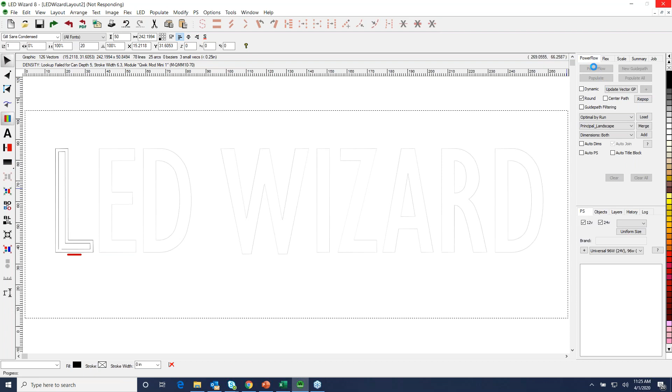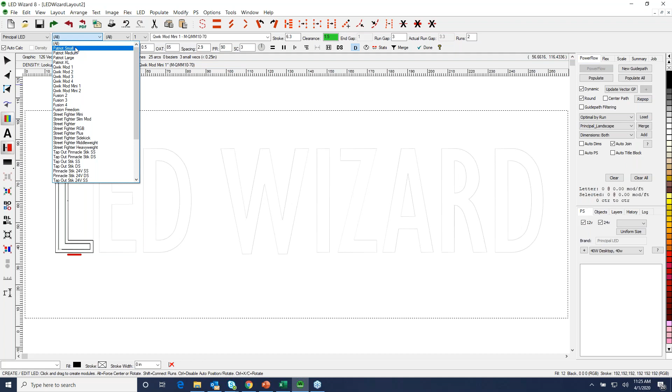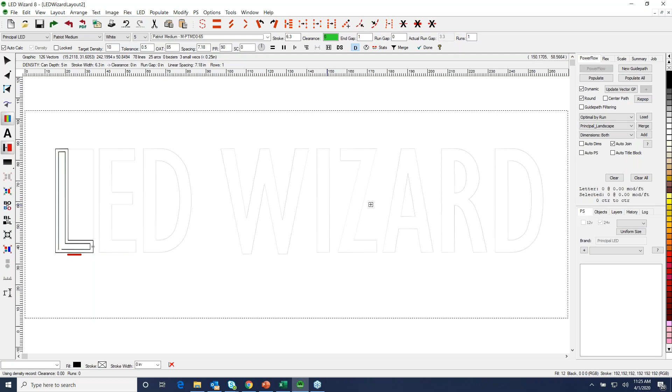So I click on Patriot Medium, and it comes in white. Medium has a depth range of 4 to 6 inches. Okay, so I select 5, and then the module drops down. There's actually just one module, and so that just drops down. So this is a case where, because I've changed the module now, I'm going to click on New Guide Path, and it's going to recalculate.

And now it looks in the density guidelines and says, okay, I just need a single run here. I've got a stroke width of 6.3 inches. I'm going to do a single run, and my spacing is 7 inches. So this is about 1.8 modules per foot, something like that. Okay, so that's how the filtering of modules works, and that's what those settings I was showing mean.

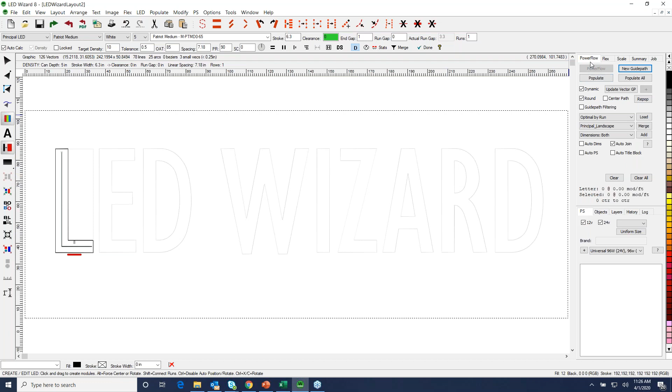So that's the default, and back over here now in the PowerFlow tab, I would click on Populate All, and what it does is it goes letter to letter, and it figures out the center of the stroke, and it puts the modules in again at, in this case, a little bit less than 2 per foot. And I think it's a good population.

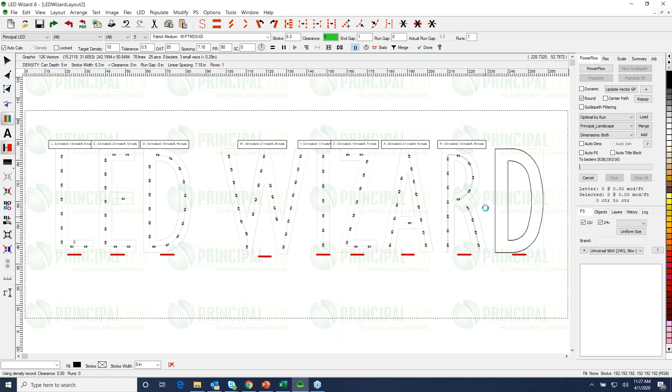We're clearly seeing some parts that we're going to want to go back in and edit, which is one of the points of the webinar, to show you the process of doing that. So this is a layout that I come up with, and I do want to point out at the top above each letter is a little stat object, and this can be customized. You can have whatever information here. I think there are maybe 5 options on this, but it tells you the letter.

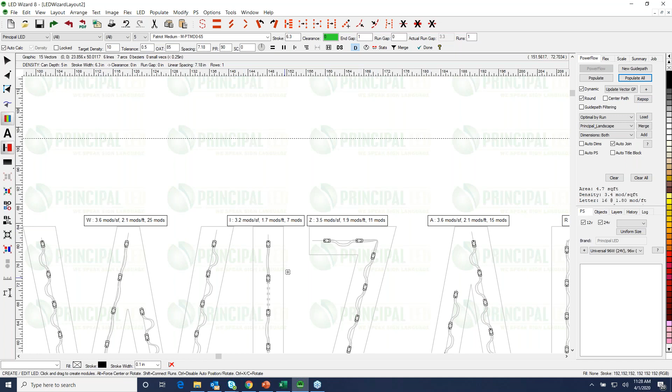It tells you the modules per square foot. Okay, 3.3 modules per square foot. It tells you the linear measurement, 1.8 modules a foot, and it says that I have 9 modules. So the idea with the modules per square foot is that you want those values to be consistent across your letter set. Okay, so 3.6, 3.2, a little bit of variation there, but this is a consistent stroke font. These numbers ought to be pretty consistent. Looks like maybe 3.4 is about the average.

Yeah, go ahead, Lauren. Next to the spacing at the top, what does the OAT stand for? Oh, OAT, yeah, it's one of these obscure ones. This stands for outside angle threshold. And what this means is like on a sharper angle. So let's say that this was actually a double layout, which it's not. This determines when the path rounds off, and when it stays as a sharp corner.

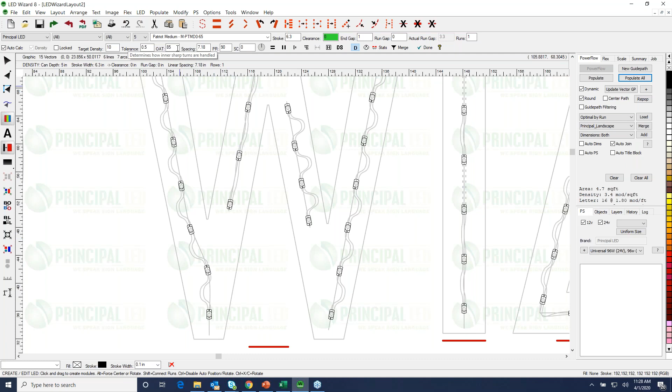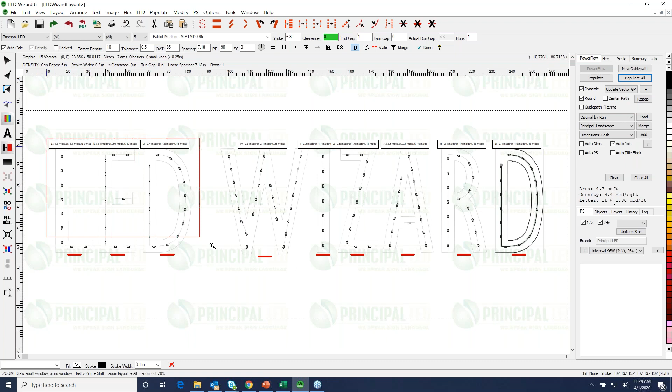So I actually like to have this value lower because I think it creates more sharp corners, which are generally better layouts. But that's what that means. So anything above 90 would actually create rounded corners around a 90-degree corner. And again, this is really more on double layouts. Jeff, we also had a request if you could demo how the mods look for a double row. Sure. Yep, absolutely. In fact, I'll do that next here.

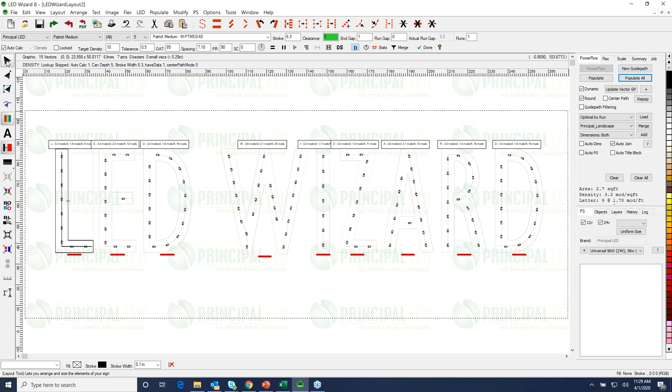So anyway, modules per square foot, again, a measurement of brightness consistency across the letters. So that's what this would look like, again, this particular font as a single. I'm using control to click and drag to make it bigger. Let's do a double layout with a little bit of a thicker stroke, and I'll make this, let's say, 72 inches.

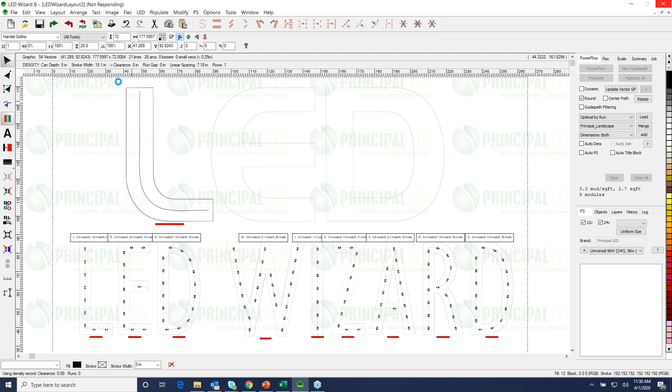Make sure we've got something really thick. And I know that the Patriot module covers a pretty big stroke with a single run. So it looks like it's got a 15-inch stroke and is still a single run, but I can knock down the can depth to 4. Okay, now it's showing me a double run. So this is what a double run looks like, and the way that we figure out the spacing on a double run is basically that we take the full stroke width. In this case 15, and 1/4 of the stroke width becomes what we call the clearance.

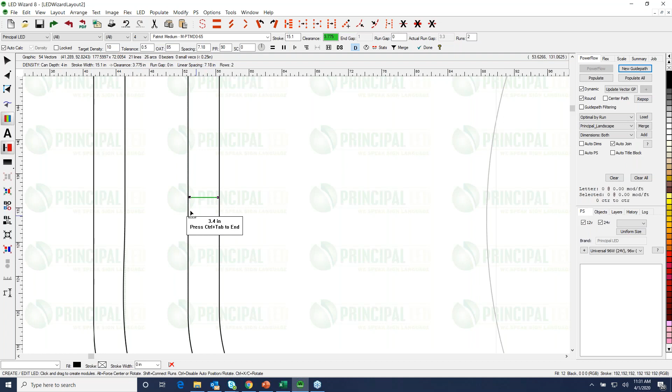This value right here, and then what we call the run gap would be essentially half of the stroke width. So that's our basic math. And in PowerFlow, if you do Control Tab, you get this little measuring tool. So this ought to be about 7.5. Okay, so that's kind of the math that we use, and that's the default. Now you'll see this red line down here, and that's actually a visual representation of the stroke width. And you see it on the letters below too.

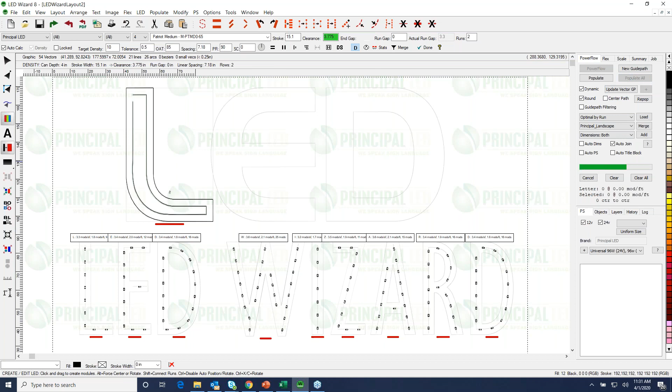So that's the actual stroke width. That represents right there 15 inches. Okay, so that's how we do the spacing. And again, for each letter, it does a calculation of the stroke width. So the D was exactly the same as the L, and the E, if I click on here, 16. So a little bit more. Okay, so that's essentially how it works on a single and double.

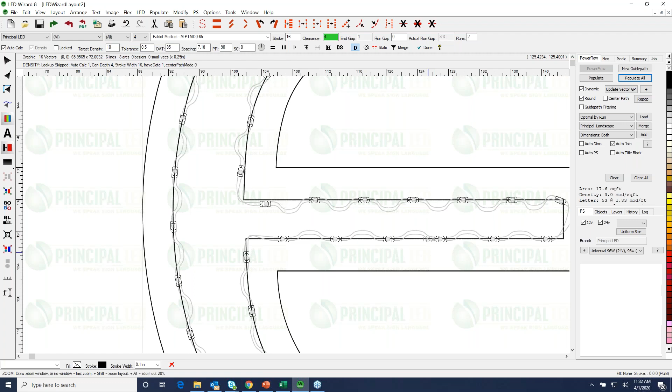And again, if you want to change that, you can see that in this case, the 16 inches is probably on this thicker stroke here, but maybe this stroke here, you feel like it's not exactly that same ratio. Then we can edit this and we can make a slight adjustment if you feel that's necessary.

Okay, so that's an example of a double, and it would go on to triple and quadruple, et cetera, if you have a really gigantic letter. Next week, we'll talk about cabinets. We'll do parallel runs and hybrid layouts and all kinds of fun stuff. But that's on cabinets.

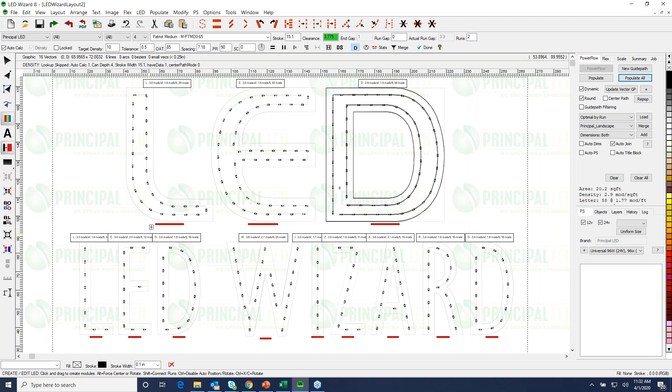Okay, so let me talk about this now. If there aren't any more questions, I want to switch this back and go talk about module editing.

Now, sometimes when you make a layout, it comes out perfect and there's no editing needed, and that's wonderful. Sometimes editing is needed, and a lot of times it's very simple - you're moving a module around, adding a module here or there, readjusting spacing, this kind of thing. So module editing is an important part of PowerFlow. I call it fine-tuning the layout to get it exactly the way you want.

There are really two different categories of module editing. There's editing of single modules, where you're acting on one module, clicking on it and moving it. And then there's the idea of multiple modules, where you make a selection and manipulate multiple modules at the same time - that's kind of what you see in this example. I've got these modules highlighted, a little bit more bold, meaning they're a selection of modules.

Okay, so let me get out of this - I just wanted to introduce that concept. So when I zoom in here, you can see that I click on a module and I can slide that module along this guide path. On an individual basis, I can do that.

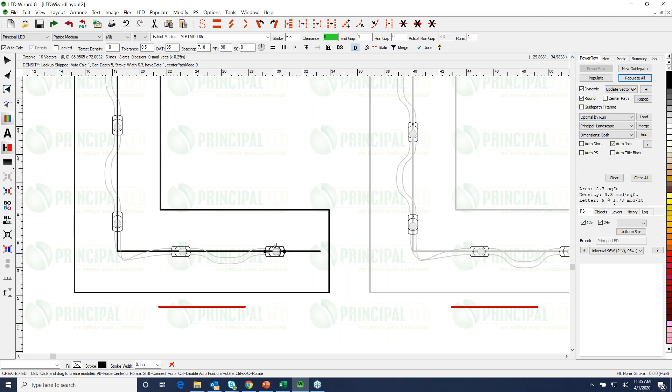Here in the PowerFlow tab, we do have various power supply loading options, and this process is pretty automated based on one of these options. I'm afraid I'll run out of time if I get into power supply loading, because that's a topic unto itself. So if the person who asked wants to reach out to me directly afterwards, I'll show it to you, if that's a fair way to do it. My contact information will be at the end of the slides. But for a letter set like this, it's pretty straightforward to load power supplies.

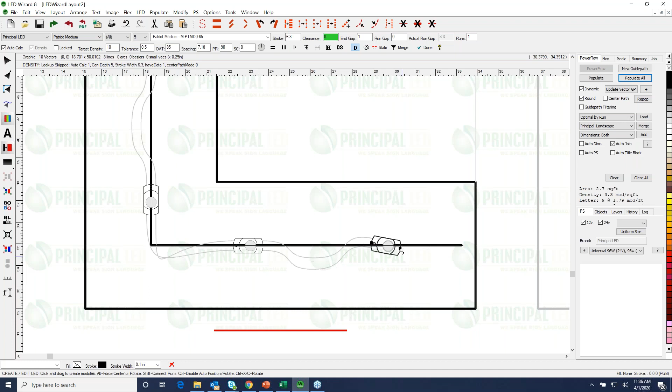So in addition to moving a module, I can rotate a module by one of the points on the end of each module. This being Patriot, a single LED module, module rotation is a little less compelling than it might be with a 3 or 4 LED module, where rotating it disperses the light a bit more. So maybe not as practical with Patriot.

Now, if you want to move off of the guide path, let's go up here to the D - I have to hold the control key. When I hold control, I can move the module anywhere. If I release the control key, it snaps to the generated path. You can see that I've got a little bit of a gap here.

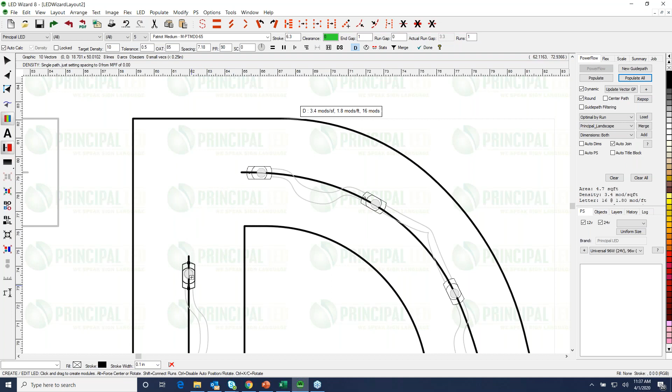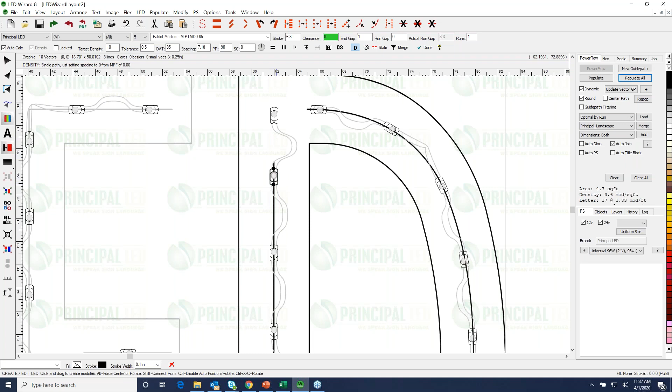So one option is to hold control and move this module here. Now I've created a gap and an empty space, and you'll notice that as I position the mouse in here, I get a green module - we call it a preview module. In fact, anywhere I move in PowerFlow, attached to my mouse position is this preview module. But when I position the preview module on a path that has the dotted line and click there, it actually inserts a module into that spot. That's one way to cover that gap.

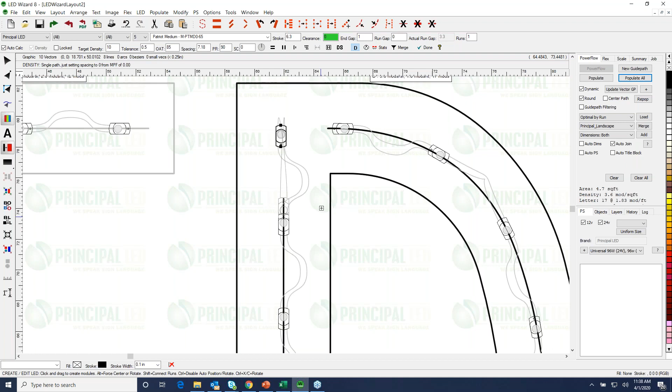Another way is to just position the mouse up there. I'll hold control because it doesn't quite know where to go, but if I hold control, position, and click, then it'll put a module there. So with this preview module, wherever I click, it's going to insert a module there.

If I want to delete a module, I just click it and press the delete key. You'll notice that as it deletes, it stays on that path.

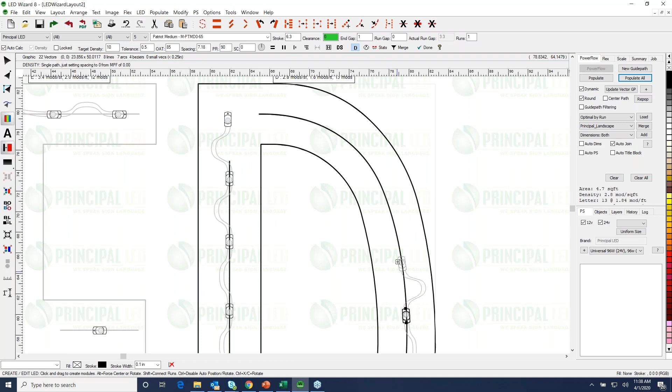To add these back, I can do this manually. I can go along here, try to maintain that same position, and click. Each time I click, it inserts a module. So that is what I would call individual module editing.

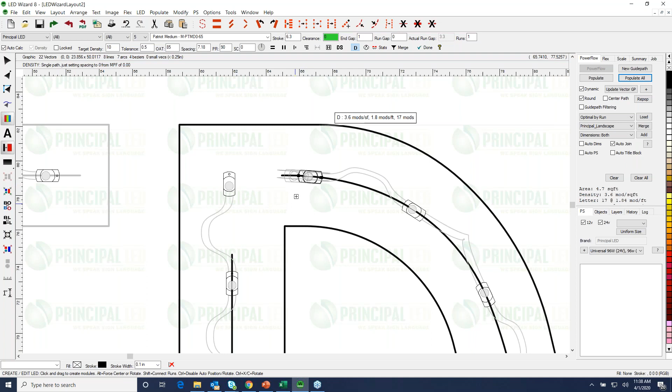There is another option here. Let's say I want my wire to break down here at the bottom, where I've got my drivers coming out of the bottom of my wiring hole. I could go here, hold the mouse, and press the O key. O is for open, and it's a shortcut key because where it opens is determined by the position of the mouse.

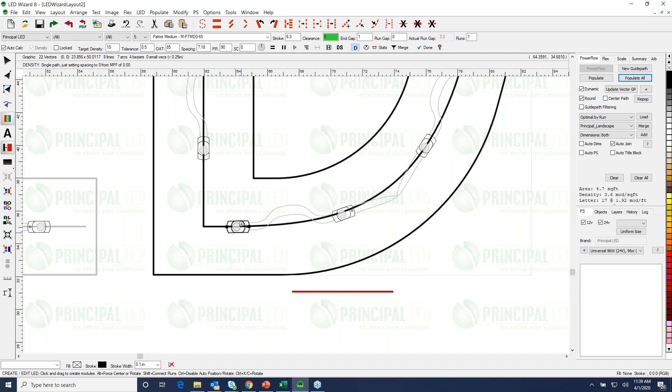I'll talk in a minute about shortcut keys and where you find them. So I've opened it there, and now I want to close it up here. In order to close a loop, I click on the module, hold Shift, and then click on the other module, bridging those two together.

Now I've connected it up here, and I've got the opening down here. One thing you'll notice is that my underlying path is now not really accurate to the layout I've created. So I talked a minute ago about these buttons here.

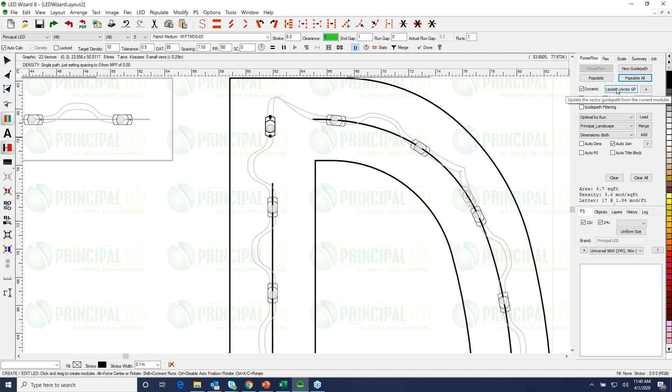I'm going to do update vector GP, which means update vector guide path. When I click on that, it says, oh, there's supposed to be a vector here because that's the position of my module. So it creates that vector, opens it, and breaks this one down here. That's kind of the relationship of the underlying path with the position of each LED.

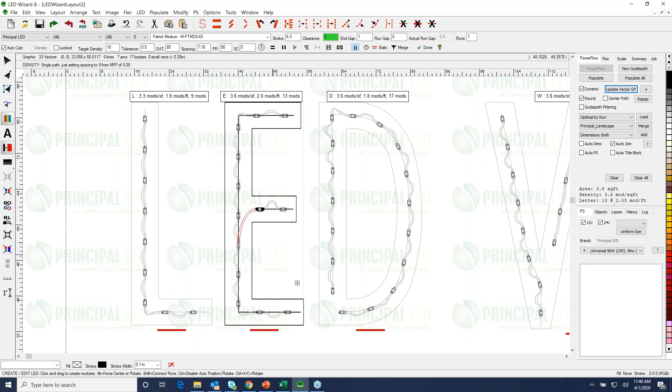Here I might look at this and say, well, I should really have two modules here. So I made that change. That's a pretty easy one.

When I look at this W, this is always kind of hard, right? When you have this tight of an angle, do I connect the run, or is the run broken? So here's a case where I'm going to need to do a little bit of editing.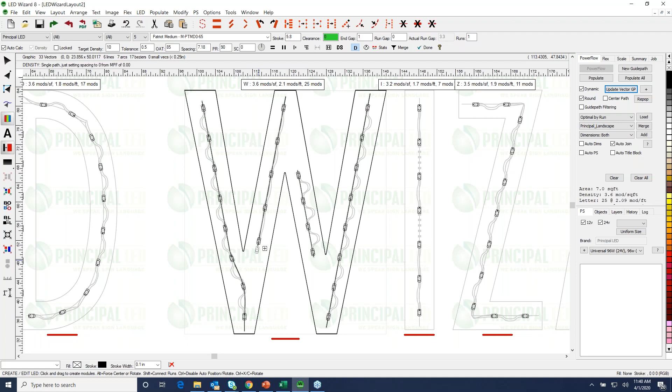Before I do that, let me go back. Apologize, getting out of order here. Let me go back to the D because I do want to talk about selections of modules before I go to edit that W.

So you notice that I was individually moving LEDs, moving them around one at a time, and that's okay if there's just a little thing you want to fix. But what if I want to make a change to this whole run? I want to put more modules, or rotate the whole run, or something like that.

Then we use what's called a selection. To create a selection, I click on the end module, hold Shift, and click on the other end. All right, that's now my selection.

Once I have a selection of modules, there's all kinds of stuff I can do in terms of editing. One of the main things you want to do with a selection of modules is make sure that the spacing is really even. In this case it is - this was a pretty good layout. The spacing's real even, but I have a set of icons up here that I have access to.

Just for fun, let me make a couple adjustments. I'm going to change the spacing, reselect this, and now you can see I don't have good even spacing. I can click on this icon called uniform spacing, and that shifts it back and makes sure all that spacing is consistent.

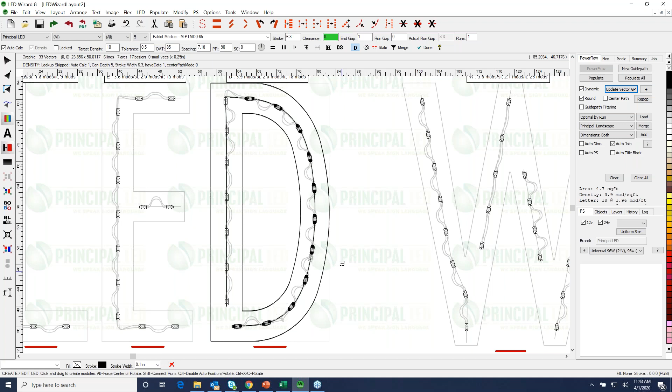This is an easy way if you want to make the population a little bit brighter. Now, if you wanted the whole letter set to be brighter, you would just adjust the spacing value right up front when you make the population. So if I change this to 6 because I want 2 per foot, or 4.8 because I want 2.5 per foot, I would do that right up front in the population, and all the letters would populate with that same spacing. That's really a better way to do it.

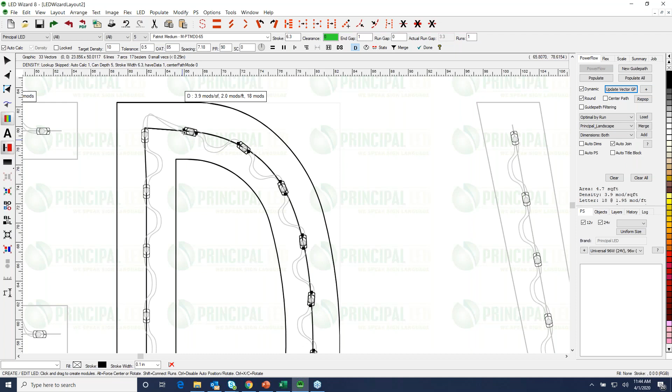But that's a selection of modules. You can also rotate. When I have a selection, if I'm rotating, it rotates all of them. Again, not a whole good reason to do that with Patriot, but that's rotation. So that's essentially what I wanted to show with select.

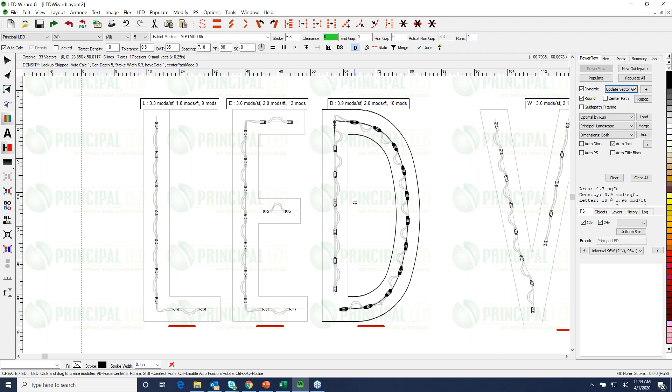Those are the most common things to do with the selection: W, E, and R. Now I'm doing it on the keyboard, just touching keys, W, E, and R. E is just for respacing. So a very quick and easy way to do a little bit of fine tuning on the layout.

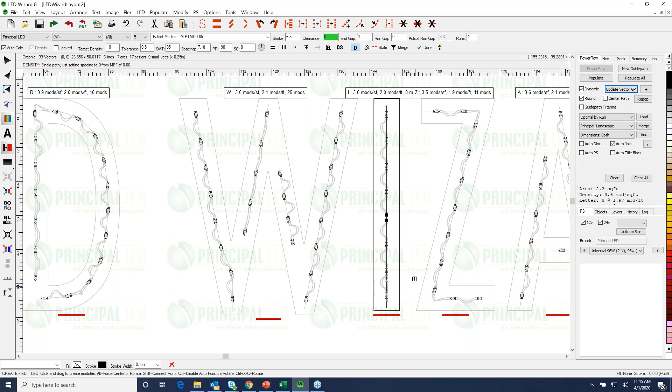In fact, if I click here, this looks to me like I've got a couple of wires there. So I'll tell you another little shortcut here, which is if you have a consistent run that doesn't go around any sharp corners, I don't actually have to select both ends like I showed you. I can just click somewhere and then do W, and that inserted one module. So that's a little bit of a shortcut.

So that's some basic module editing: moving on and off a guide path, adjusting positions, opening and closing loops, that sort of thing. The W here is a little bit more challenging, and I want to show the next step of this, which is editing of the underlying vector guide path. I think this is a good example to show that.

So I could use the same tools that I was just describing. I could put a module out here, and move this up here. But the other approach to doing this is actually to go into the vector edit tool. Now I can use my vector editing tools directly on this path. If some of you are new to the software coming in here with a background in programs like Illustrator, AutoCAD, CorelDRAW, these are all vector-based programs. So if you're new to the software and prefer to operate in a vector world, you can do that too.

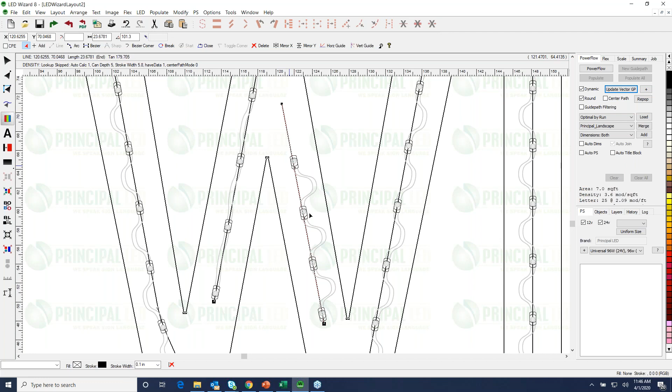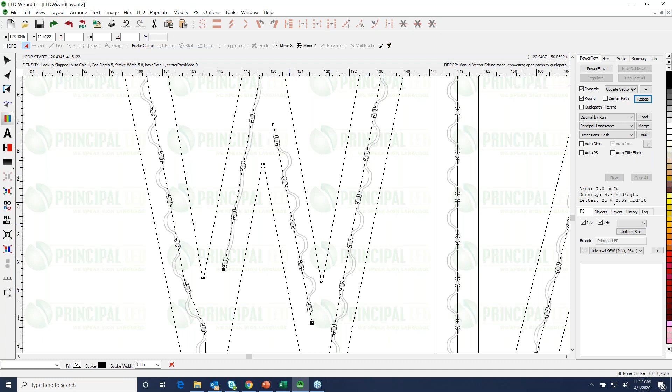You can just click and drag this endpoint. I move that up. Click and drag this down to fill in that gap a little bit. And now I would go over here and say repop. So this is kind of the opposite of what I did here. Repop says, take that new path and repopulate my modules to that path. It doesn't happen automatically because there are too many refreshes as you're editing, so we ask you to make the edit and then click on repop.

And I thought about it for this little case here. So here's a case where this run tried to sort of split the difference as these two strokes came together. And really, I don't want to do that in this case. I'd like it just to be straight. So here's a couple Bezier curves. I can delete that point entirely.

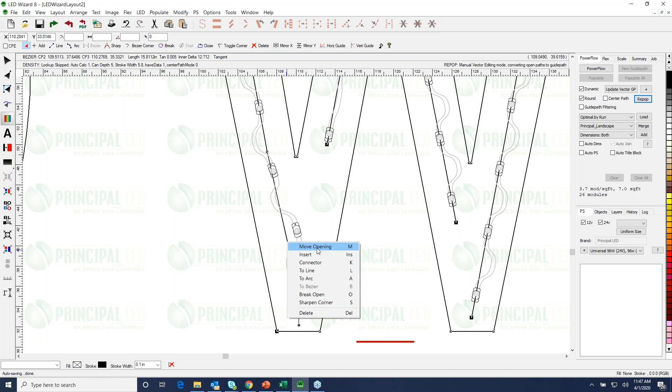If you're a previous user of our software, you know about the vector editing pop-up menu. So if you right click on a vector, you get this little menu. And I want to say to line, right? So I'm going to make this into a straight line. Actually, there's a little jog there at the bottom. So here's my straight line.

And again, I'll do repop, get that on there, bring this guy down. So you don't have to do repop all of the time. You could do it once at the end after you've sort of edited. But you know, I would do something like that, right? You probably don't need 2 modules coming into a corner that sharp.

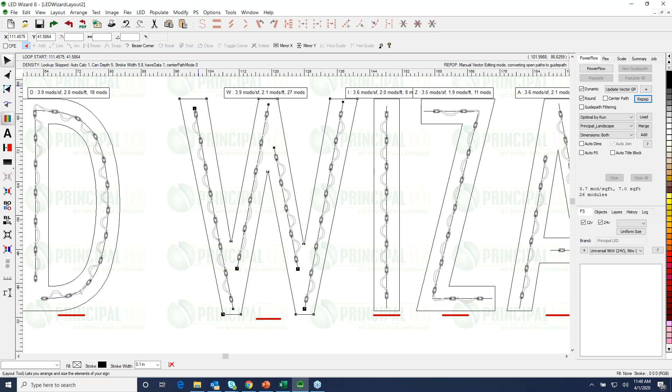So that's an example of using vector editing tools. So really, you can operate in PowerFlow if you're comfortable with those tools of just moving modules around, or you can operate in a vector editing world where you're actually editing those vectors and then having those modules match up. All right, so that's some of the basic editing that I would do.

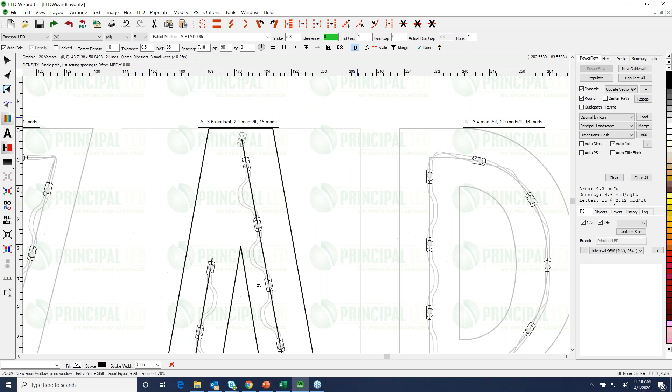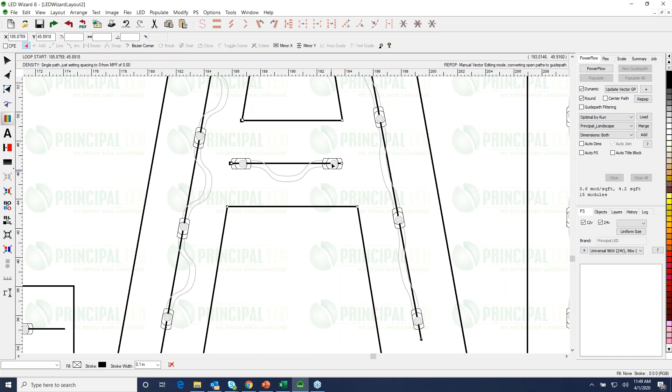Do this one more time, bring this up, and what I want to do here, oh, there's an extra line there, I don't need that, delete that out. What I want to do is I'm preparing this layout here to show you how the scaling tools work. And the scaling tools are a really fantastic part of the software where you can take this layout and we're going to scale it up to a larger size.

Jeff, one question. Sure. Will it auto-flow around mounting points if they're in the artwork that you import? No, it's really better to add your mounting holes and your wiring holes after you populate. If you have those in your artwork at the beginning and you break into loops and you don't include that artwork when you populate, then that's okay. It would just sort of populate on top of them.

But the workflow that I always suggest is, get the LEDs where you want them first, and then figure out where you want the rest of the holes to go. And we have a tool for that, and we'll talk about that when we do the production edition in a few weeks. We have a mounting holes tool and a wiring holes tool, but I think it's better to have the artwork be clean without that stuff when you go into PowerFlow.

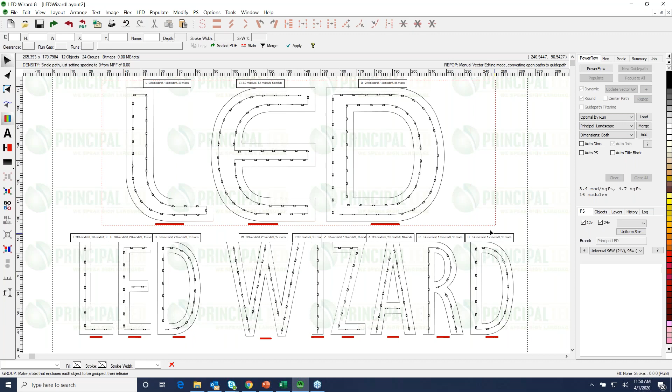Okay, so let's say that this is my artwork. This is my finished. And I'm going to go in here and I want to scale this and I want to make some new sizes. And this is kind of the punchline for the concept of the vector paths and getting this to be really clean artwork. Because what we do is we scale this to new sizes, and we use that vector guide path in order to do that.

So I'm going to take this and I've added what we call reference guidelines, and those go at the top and the bottom. And you can see that it says current size 50.01. That's pretty close. So I'm actually going to go up. So let's do 60, 72, 84, and 96.

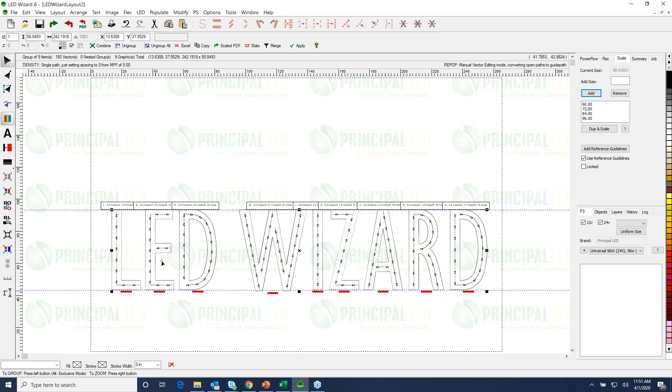And I have some slides for this that I'm kind of skipping over, but the idea here is, let's say that you have this artwork and you have a program, or you have multiple locations, or you have a front and a side of a building, what have you, and you need to make additional sizes of this. So I take this initial layout and I clean this up and I make this really good, clean, covering everything the way that I think it should be done. And then I go and I make these additional sizes.

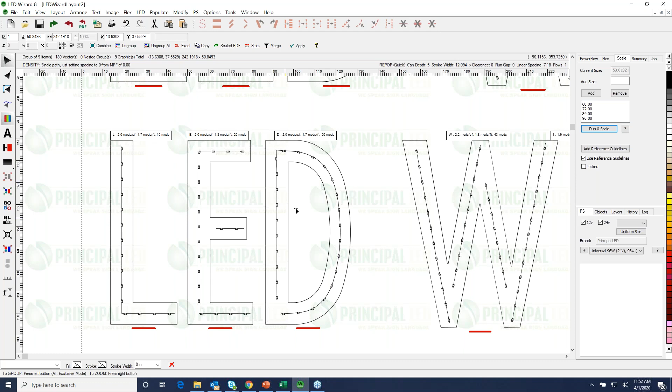So I add all of these, I click on dupe and scale, and now it copies these and it repopulates and scales this up to each size. And so again, if you used LED Wizard 7 before, you know that what I just did saved you several hours. Previously you would have to start over with each size, right? Now you can make one size and you can scale up.

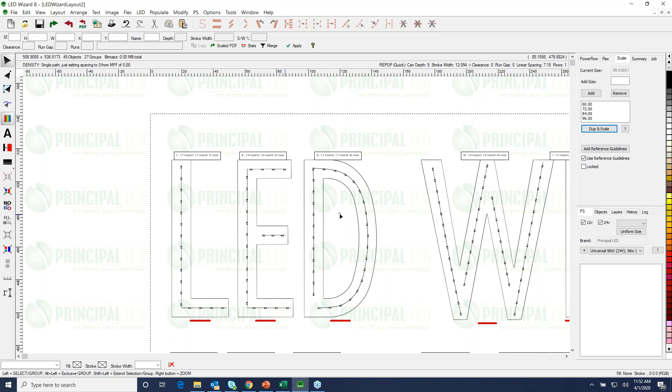And even at this bigger size, I've got a stroke width, you can see here, of 12 inches. I'm still well within a single run for the Patriot Medium module. Okay, but look how clean and consistent this is. It follows the exact same path as I did on this guy down here. Okay, so I scaled those up. You could also scale them down.

Now, if I got to the point where this was so big that it goes to a double module, then it would actually automatically do that. And let's see if we can get that to happen. Now, in addition to the scale tab, I can also just scale this graphically, right?

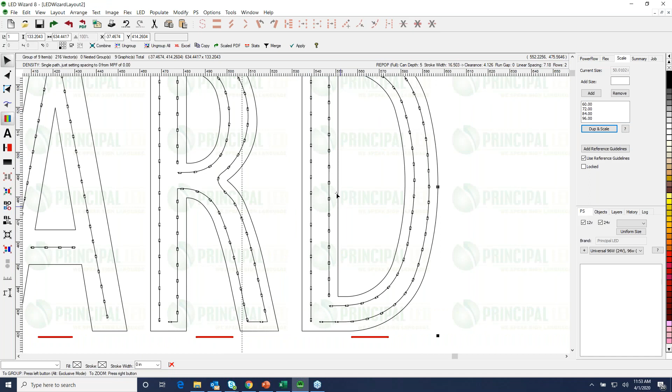Oh, okay. And now we're switching to a double. So whatever stroke width I did here, it's now a double. And maybe I'm right on the edge because I have singles and doubles, right? So see how I did that spacing. So I didn't have to go back in and really do anything. You can see actually that the W stroke width is a little bit smaller, right? So that's probably about right. I'm probably right on the edge. Let me go a little bit bigger.

And even though the spacing's the same, it's now switching it. I think the W will go to a double run now. So this is part of the scale tool, and each time that it scales to a new size, it reads the new stroke width. It says, okay, do I need a single? Do I need a double?

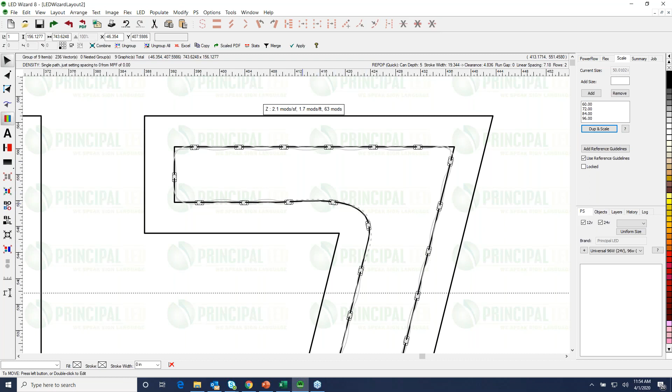And here's an example, guys, about what the outside angle threshold is, OAT. It's rounding off here. Okay, so if I had that OAT value lower, like 20 or 25 or something, these would be sharper corners. So that's just kind of a design thing.

Jeff, where does it show the new size? Where does it show the new size? If I have it grouped, then it's going to show it right here. This is the height. Because I graphically did it, that's a little bit obscure. But let's say that it's supposed to be exactly 150. So I can type in a value. What happened there? I can type in a value directly, and it'll scale it to that size.

Okay, it took a little break there. So that's 150. So I scaled it to a numerical size, and that's the way I should have done it, because I don't know that many LED channel letters that you're graphically scaling, that you have that kind of design latitude. It's always sort of predefined, so you can type in a value there.

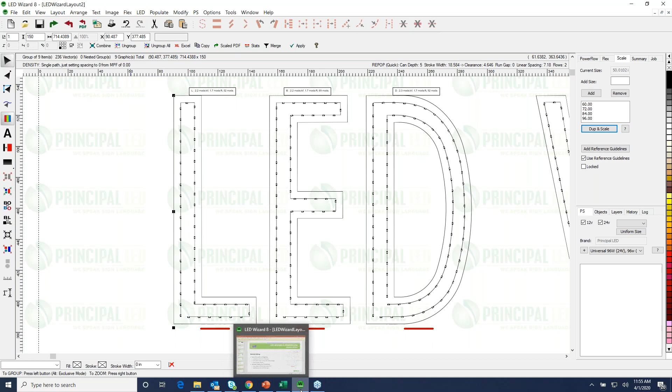Okay, so that's scaling. Let me just go back here, because I'm afraid that running out of time, I might have missed a couple things. So this is what I was talking about, vector guide path editing, editing the vectors. This is the scaling tool, as I mentioned. So 3 options for scaling. Make that master layout as clean as possible as your original to scale from. And remember to add those reference guidelines, as I did. And the reference guidelines are critical, because you want to make sure that you're measuring the height correctly, right?

So, we always think of letter height as the square cap height, right? We don't think of letter height as the O or the S or a round capital. And so that's why you want to make sure you use the reference guidelines so you're measuring correctly as to the letter size.

So again, here's an example. We've seen internally and within Principal LED enormous productivity benefit of the scale tool, especially for large programs, jobs that have multiple sizes. What I would do after this, if these were all different sizes, I'd group each of these. I'd copy, paste this into a new layout, Control C, new layout, paste that in. And now I would load power supplies, merge this into a title block, and that would be the file for that size. Okay. So anyway, scale tool, play with that. A lot of fun and a lot of productivity packed into that.

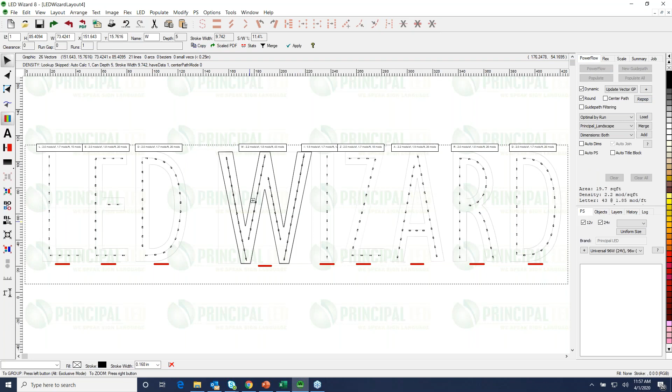Before I finish, I did want to just mention in terms of module editing, if you go into the modify menu, there's all kinds of stuff here, and I only gave a few minutes, but there's rotation options. These are all the density adjustments that I was talking about. You can mirror an object back and forth. You can open and break runs like I was showing you. You can convert a run to a straight line. You can shift a run in and out from the return.

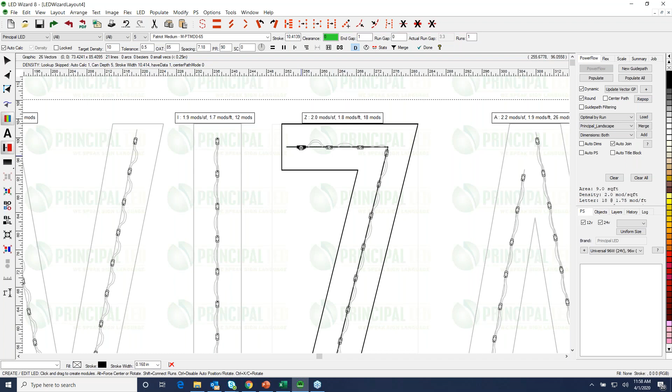Let's say you have a variable stroke. You can make a selection. You can shift in and out. You can center runs in a stroke. So all kinds of stuff here, and some of this you just go into PowerFlow and experiment. But really, it's a very visual task here. You just want to make sure everything's even. If you need to edit, for the most part, you just click on something and move it. It's pretty straightforward.

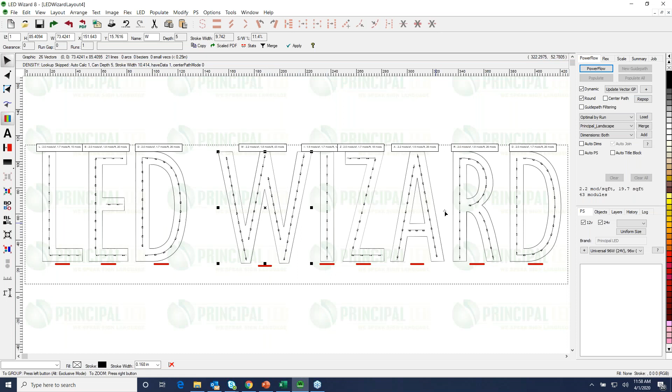So let's see. Troubleshooting. There are different things that can happen when you go into PowerFlow. You might have a letter that's entirely skipped, or you might have missing sections, like a section or a serif or something like that. And it's pretty easy really to handle that. I mean, if I clear this and I also clear

the guide path out of there, right? So I see this little path here, and if I don't like that path, or a module doesn't come through for some reason, I can click and drag on that path, and it's going to populate, and it snaps to that path. If I don't like that path and I want to do it manually, I'm holding the control key. And even that, it was all jiggly, and it still looks pretty good, right?

Holding the control key. So you might have script letters or something where the path doesn't look very clean. You can manually draw in there. Okay, and in fact, you can always just click and drag on a path and put in modules, and it'll understand the correct linear spacing when you do that. Excuse me. So there are options. You don't always have to use the automatic tool.

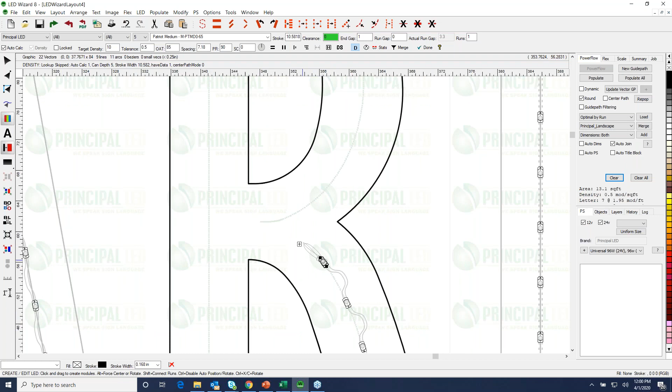There are some cases where, again, text is welded, or it's a script or something, and visually you can sort of see the way you want it, but the path isn't quite showing it that way. Then you can draw that in there. I mean, there are cases you might go here and say, I'm holding control, and I want to connect it there, right? Or I want to come through and connect this way for some reason. Maybe this has to do with how I'm going to load the power supplies or something, right?

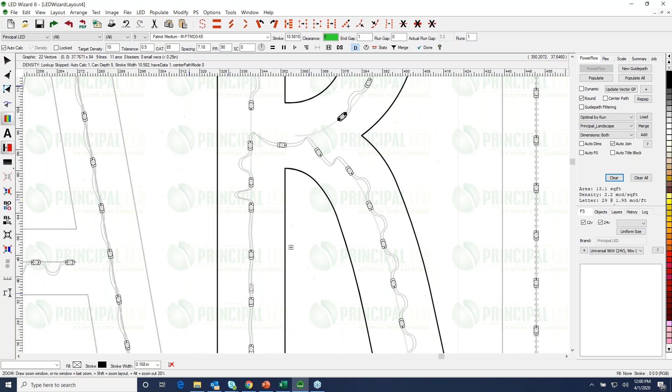So you have more customized control if you just do it manually. And then in a case like this, I could hit E for respace, for example, and sort of clean that up. So there's a lot of flexibility. I think you always want to start with the automated option if you can, and then if you need to, you can take a more manual approach.

Inconsistent modules per foot, again, respacing, right? If you have something that's a variable stroke, maybe on the thicker part you want to put a few more modules in that section. Maybe you want to rotate modules through that section to be consistent. So that's something that you can do.

So we're about out of time. I felt like I was rushing. There's always so much to talk about. If there's any further questions, and if folks want to stay on, I'm happy to stay on here as long as you want.

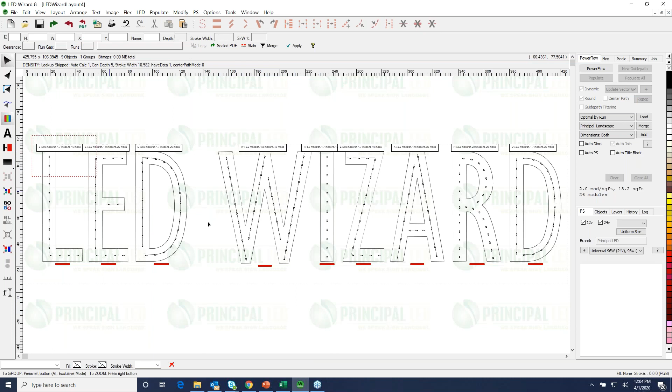Yeah, if there's nothing else that's pertinent to the rest of the stuff that I covered, now that I look at the schedule, we don't have a specific power supply lesson yet. I suppose we could add one, but I'll go ahead and go through on this layout what some of the power supply loading options are, if that's something that everybody wants to see.

So power supply loading, there are multiple ways to do it. And again, I think the automated tools really are going to be the best. So when you have your layout finished, and this is actually a case where I'm doing this outside of PowerFlow. It's one of the few things that we can do outside of PowerFlow, and mainly that's because with the layout tool, I can select exactly the objects that I want to load onto my power supply.

So again, if I had a cabinet and I had some channel letters both on the layout, maybe I'd say I need a 24-volt driver for the sticks in the cabinet, and maybe I need a 12 for the modules or something like that. So that's kind of why we do it that way. So I'm in here. I've got my population, and here in this drop-down list, I think the fastest way to do is we have different options, and I'll just explain. So one per letter would be self-contained drivers for each letter.

Okay. Before I do that, let me go down here. So this was Patriot. So we have the 96 watt 24-volt driver that we use for Patriot. And that driver is already selected here. So there are the options of all of our drivers that are in this list. So the first thing really is to pick the driver that you want. So one per letter, self-contained, one for all letters. If you have a small letter set or a small job and you just want to put those all on one driver, you would select this one.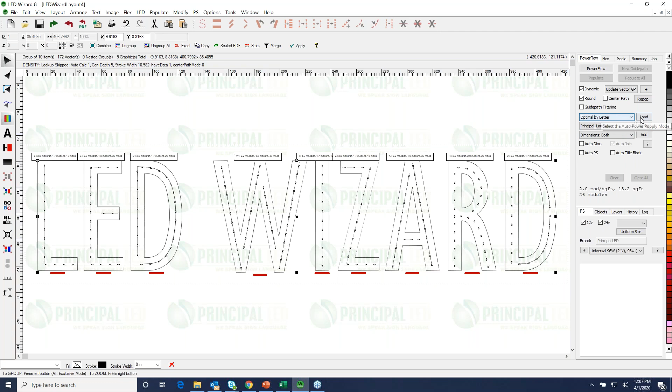And then optimal by modules is the most granular of all the options, in the sense that it will load the first driver to 100% before it moves to another driver. And it will break a run and break a letter as needed in order to do that. So again, each of these has their spot. I would tend to do optimal by letter for something like this. So once I've selected that, I've got the driver.

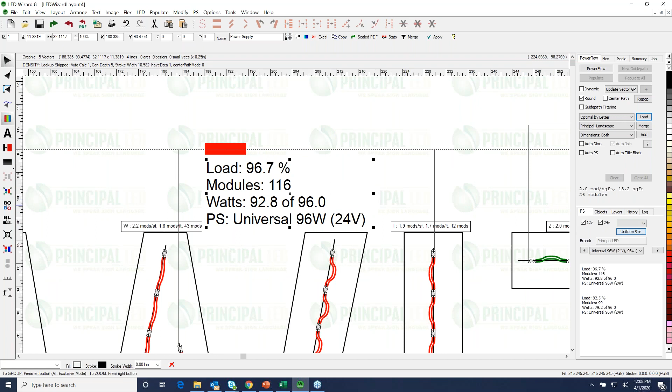I click on load. And interestingly enough, we barely went over. Is that right? Let's see. No, I take it back. So we've got actually pretty decent loading. So you can see how the wires come off. Let me just make this a little bit bigger so we can see this a little bit better. So I've got the first 5 letters on the first driver.

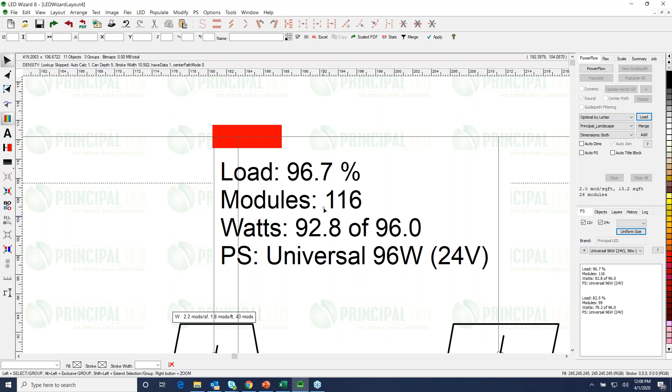Remember that we load our drivers to 100%. So I've got 96.7. I've got 92, almost 93 watts on the first driver, and then 99 modules on the second driver. And remember, of course, too, that we have smart packaging, so you will get a driver with the bag. And I'm not sure what the maximum is, just a couple more than this, maybe 118 or something like that. 120 it might be for this module.

Okay, so that's the simplest way. You can position this wherever you want to. I tend to like to have them at the bottom. Other people will put them at the top or off to the side. That's completely up to you. When we talk about cabinets, then in stick products, it's just sort of stick by stick we'll load.

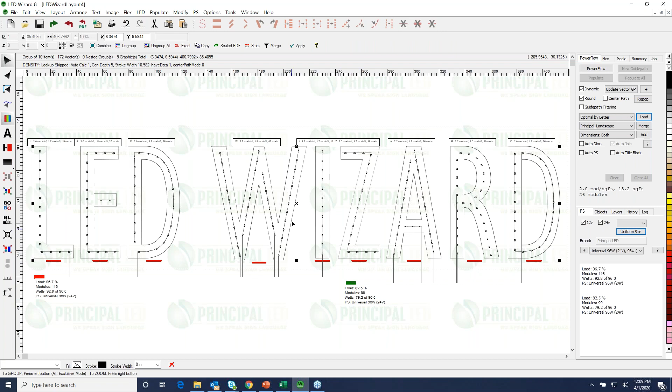So, and then if you wanted to adjust this and say, well, I want these letters on this driver and these other letters on the other driver, you can edit and change that. Up here in the summary tab, it will show you exactly the watts per letter and the total watts. So I could have looked at this ahead of time and said, okay, I've got 172 watts. I know that'll fit on 2 96-watt drivers, no problem, right?

So sometimes I've seen users, and we do this internally, you take a peek at this first and you figure out, okay, here are my total watts, and what driver would I choose in this case, right? If this were 60-watt drivers, then I'd have 3 of them, 2 120-watt drivers if this was a 12-volt. Anyway, so that's power supply loading. It's fairly straightforward. There are some additional ways and additional things you can do, but as a quick review in a few minutes, that's the procedure.

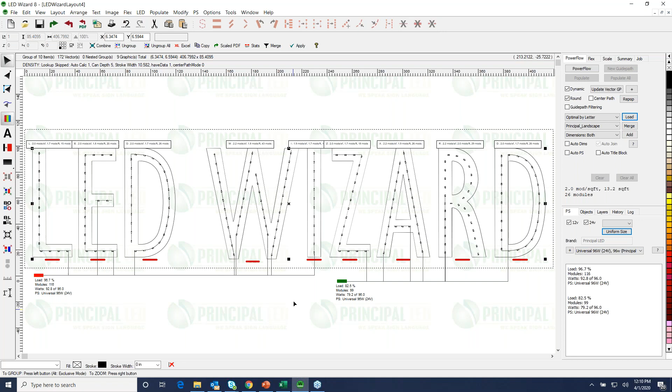After this, I would merge into the title block, and again, that's getting beyond what I wanted to talk about today, but that's a final step. You merge into the title block, and all this data comes in, and this is really sort of finishing out the workflow. And I can put dimensions. I forgot that. So there's the dimensions. So I mentioned the idea that you can set up all these things when you do the initial population. That's something that I could have done, and all of these things would have happened essentially in rapid succession.

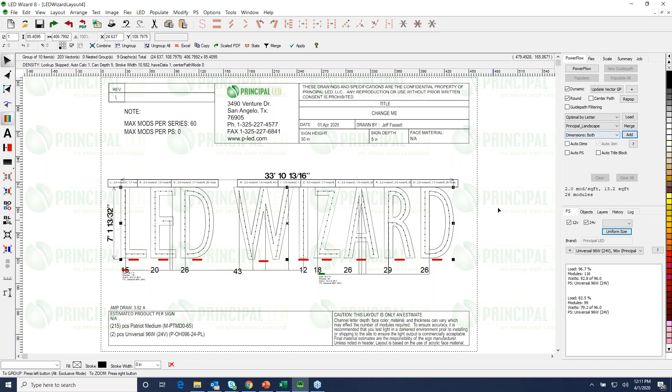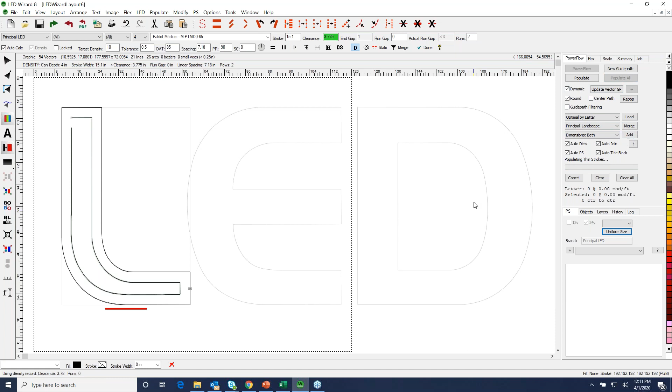So let me show you. I guess I can do this one with the double run. This was the double run example. Let me just go back to 4 inches. So this is Patriot Medium, 4 inches. A 15-inch stroke is coming in at 2 runs. So if I just click these buttons, optimal by letter, the principal landscape, title block, the dimensions. Now when I say populate all, it's going to make the layout, load the power supplies, add the dimensions.

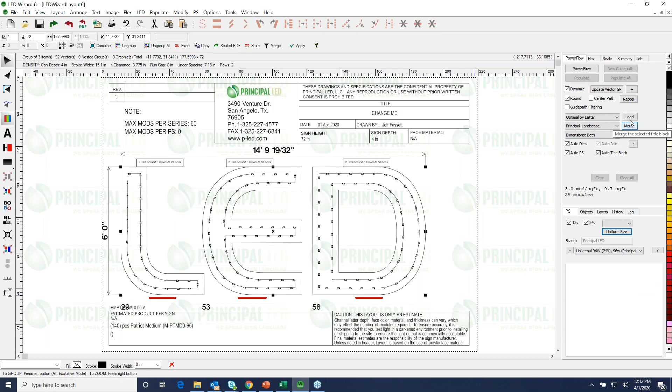Oh, I had the wrong driver selected. So it did everything except for load the drivers. But the idea is that you would be able to do that essentially all in one step. So let me just pick. Not sure why that didn't work. I thought I had the right driver selected. So I just went back and reselected it and redid it.

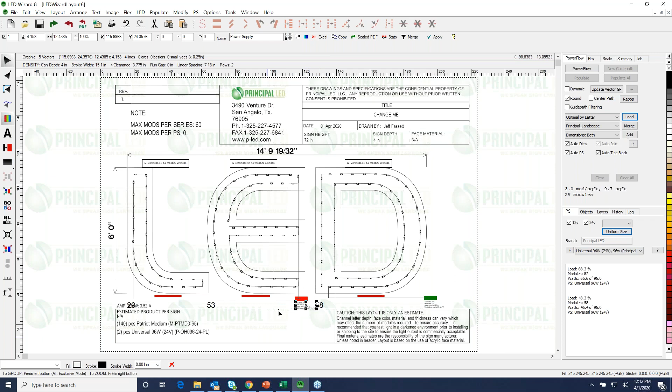So to sort of bring the full workflow together there, that's a way that you can do a layout quickly, and a little bit more like how the online tool works, where you just go in there and very quickly get a finished layout. So those are the tools, and I still consider that part of PowerFlow. So you can adjust this, and you can scale the title block up a little bit. You can organize this stuff how you want. So that's a quick preview: power supply loading, and then some of the automation that we have for going all the way through a job.

Is that sufficient for the person who asked about the power supplies? Do you want to see anything more regarding power supplies? Jeff, it sounds like that pretty much covered it.